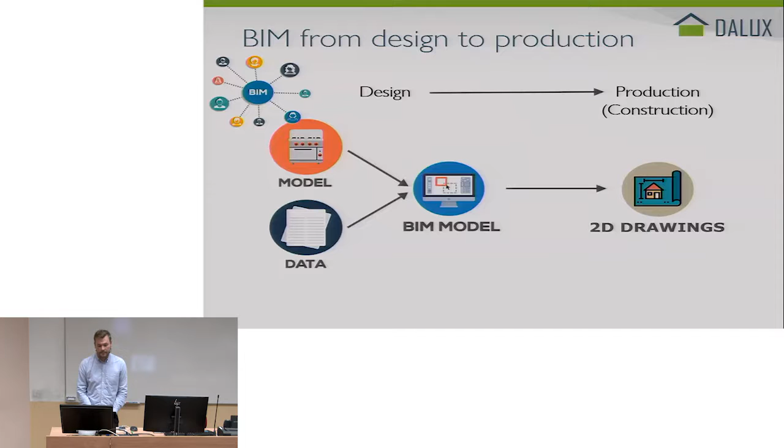So what we've done at Dalux is we created a BIM viewer. And a BIM viewer you can use on your mobile device. So what we tend to do at Dalux is make user-friendly software that's easy to use on site. Because when you go to a 3D model, if you don't have experience walking around a 3D model, it takes you 2 seconds and then you're lost.

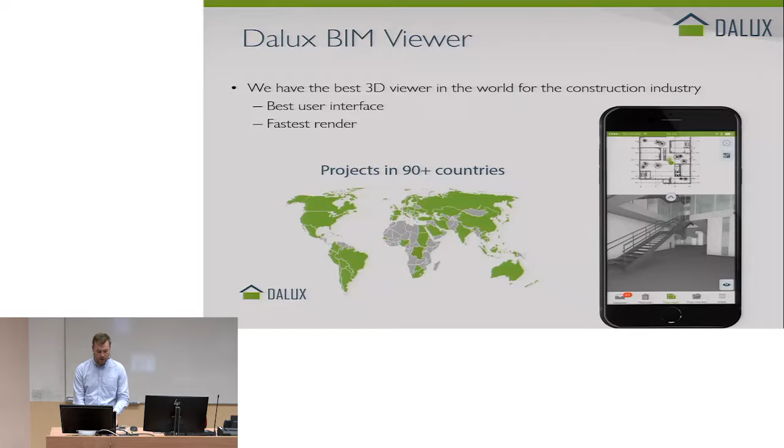So what we do is we have created software that makes it possible to take these really big BIM models on site, and you have the information directly on a device. At the moment, this is free software. You can download and use it to explore your models on site, and it's used in over 90 countries around the world. So instead of just talking about it, I really want to give a small demonstration of it.

So, can you see? Yeah. Maybe it's a bit confusing.

This is my mobile device, and here I have a 2D drawing. When the project managers upload the 3D model and the 2D drawing, you have that directly here on site. Every time they update this information, you have the newest version on site automatically, in a tool you already have in your pocket. This is now a very powerful site tool.

So I can navigate around this 2D drawing and see the information here. If I click on a room, I will have all the parameters of that room assigned to it, directly on my phone.

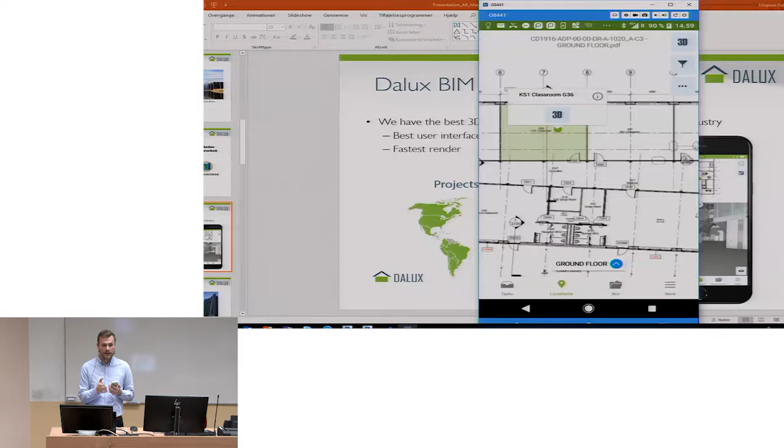But where it gets really, really good is that you can take that room and click on 3D. Now I have my 3D model directly in my pocket and I can walk around it.

For this to be user-friendly for people who've never been able to walk around a 3D model before, we have the 2D drawing on top. So you can always see where you're walking, where you're at in the building, and you have that information directly up here. You can also use that drawing to press any room you wanted to go to.

If I wanted to see the staircases, I just go there. Zoom in and zoom out.

The same goes for the possibility to create different filters. Different filters can be very beneficial for different workers. For example, I have a construction view here. I've just used the parameters of my Revit model to create different filters, and I'm able to use these filters directly on my device. This is just the architectural model, and it goes on and on.

Another thing, you can create sections directly here on your device in real time. You could also do it here, if that would make more sense. And it's all done on a device I have in my pocket already.

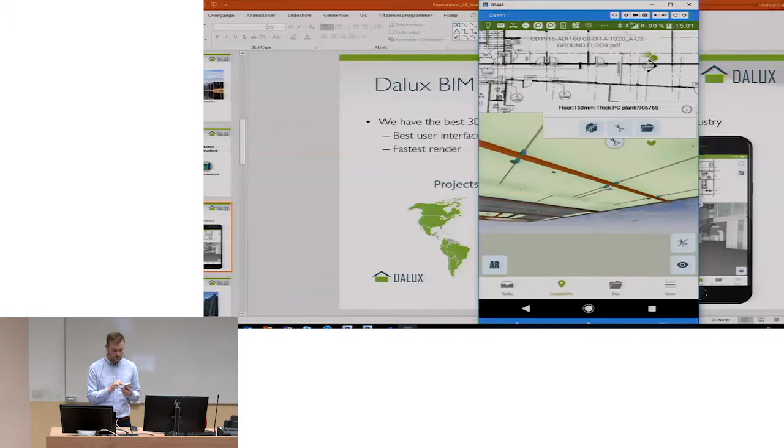You can, of course, hide stuff, if that's something you need, to have some information behind a wall or the ceiling, if you wanted to see the ventilation, or hit the right spots. Let me go out here, that's better. So you can see all that, what's behind the ceiling, and you have that available on a mobile device.

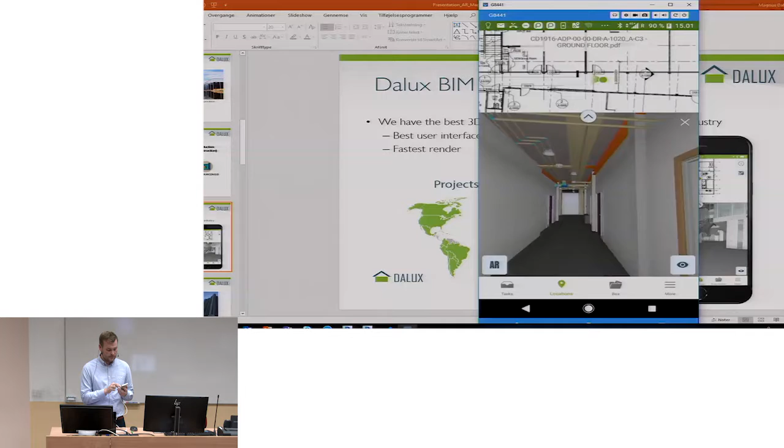Whenever you add information to the model as a parameter, you have that in your pocket. So if you have a ventilation pipe, you can see the offset of that pipe directly in your pocket. You're not able to see that on a 2D drawing. So whenever you add information in the BIM model, you have that information on site.

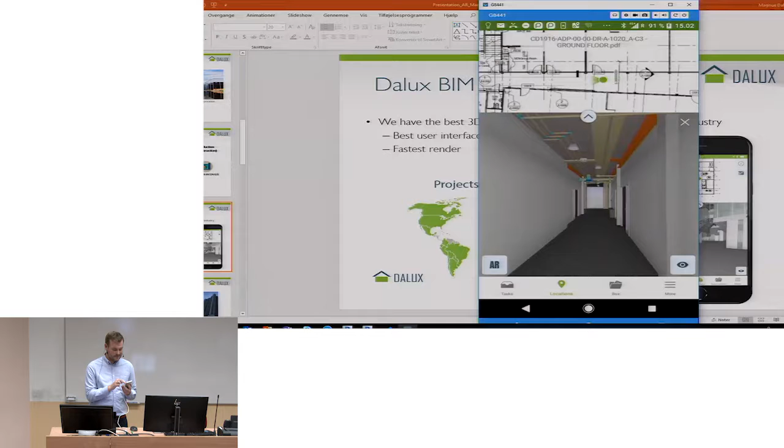So that's our viewer. And when I say it's the best viewer on the market, I have an example here.

This is a guy called Stephen Au who uses this BIM tool in Hong Kong. He has a project with 5 skyscrapers, 189 Revit models, all federated in Dalux, and he's able to show that on his iPhone. That's 2.6 million square meters of BIM model directly in your pocket, with information attached to every object. That's quite impressive, I would say.

So what we've done on top of this software, we have now looked into the new thing called augmented reality, AR. When we wanted to bring this tool into Dalux, we had a bit different success criteria that we wanted to achieve. Because we have this BIM model on a mobile device, we wanted to bring this technology into AR. One of the things was we wanted AR without these space helmets - I'll get back to that later. We wanted it to be flexible, so different people on site could use this very easily, and we wanted to fit it into a mobile device.

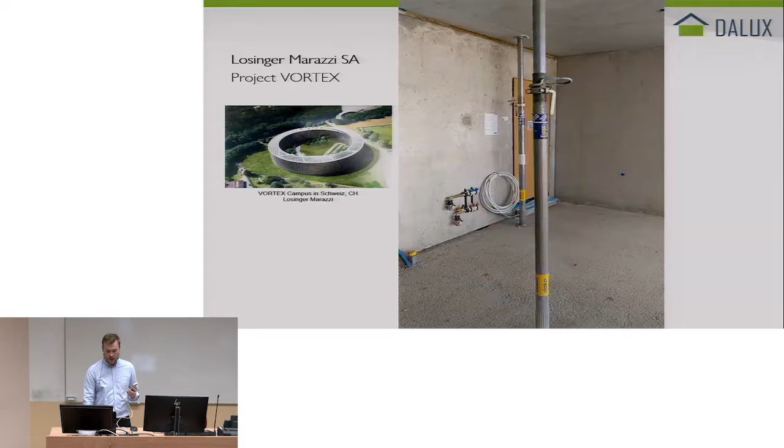So I will just show you a small video. This is a company called Losinger Marazzi, who made a video of this on a project called Vortex in Switzerland. So this is just a small video that shows how they used it.

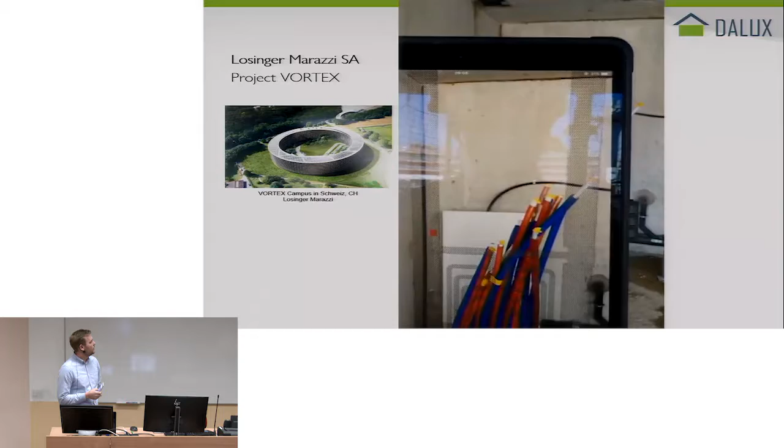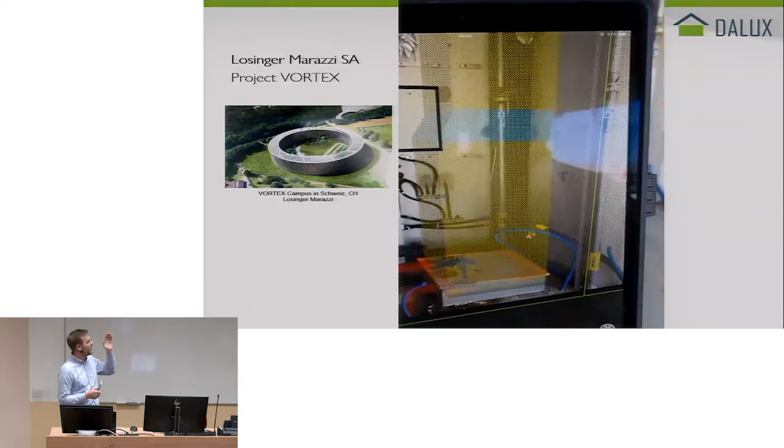So they can see, when they go on, what's behind the walls and what's coming. Here you have a ventilation shaft behind the wall. When you go a little further, you can see the walls that's coming, that's not been built yet. Here you just have the concrete and you can see where the wall's coming, but it's not there yet. So you have that information directly on site.

I'll try to do a live demo later, so we'll see if it works. They use this on a big project in Switzerland, and they all have that when they walk around the site.

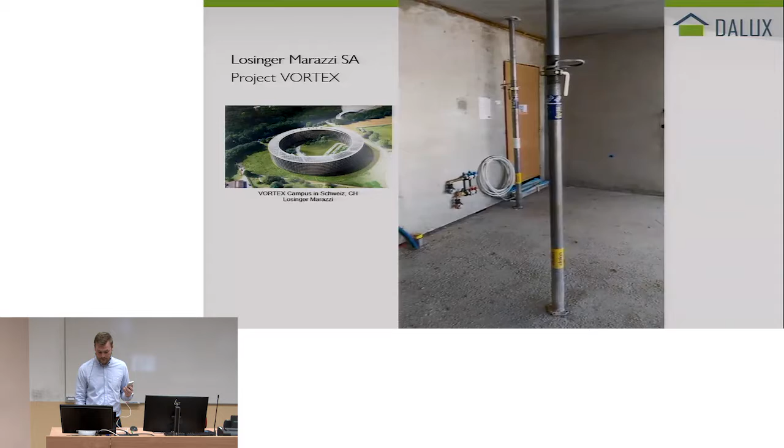So the development of this tool started in 2016 because Microsoft launched HoloLens, and HoloLens was the first technology that could fit this, make this AR. So of course what we did at Dalux, we bought a HoloLens for $3,500. That's a lot of money.

So HoloLens is a solution where you take these glasses on and you can walk around and see your BIM model on site and what you see in real life as well.

Some of the barriers of the HoloLens is that you need to have a safety helmet. This was back in 2016. I know that Trimble have come across this, so of course it's possible, but that was the barriers back in 2016. HoloLenses, each glasses are very expensive. I think they would cost around $5,000 a piece. So there's a big expense to put into a new technology where you don't know if it's working yet. And of course there's short battery limitations, so when you use it, it's from half an hour to 2 hours.

So what happened in 2017? Google launched Tango. They took the technology of the HoloLens, put that into a phone, and then we were able to develop this for the Google Tango phone. So in 2017, we released AR on a mobile device. This was never seen done before, so this was revolutionary.

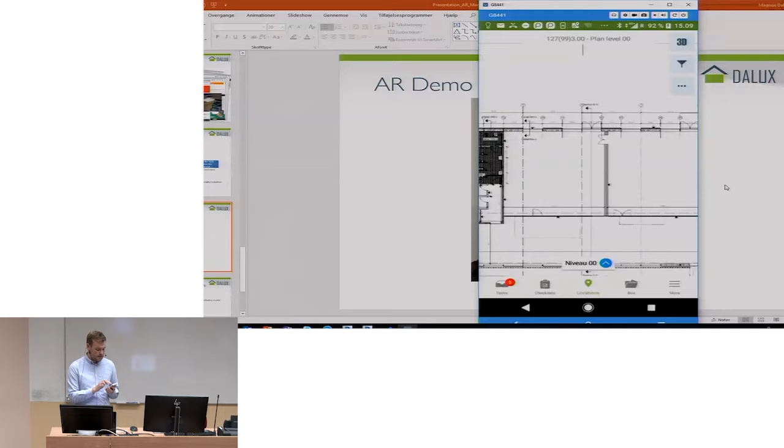So I'm gonna go into my locations. I'm gonna pick a 2D drawing now. I'm just gonna turn off the snags so it's not too confusing. I go in here, I find the room that I'm standing in. I'll place myself in the middle because this is a presentation. Normally you would put yourself in a corner because you have to align the BIM model to a corner. Maybe I should actually stand out here because that's better.

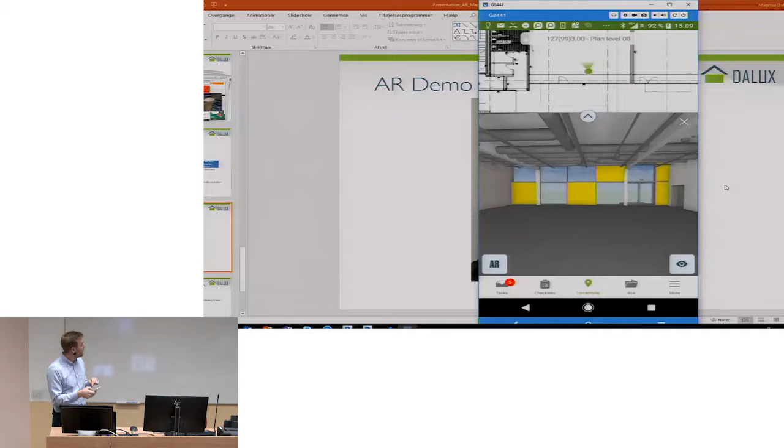So here I have my 3D model. Again, I have all the information here about the different objects in the BIM model. But now I have the ability to click on AR down in the left corner. So I click on AR, and let's see if it works, because I need a bit of lighting on the floor to scan a reference point. This was actually quite easy.

Then I would rotate the model and find a corner. This is again an example, actually a DTU project back in Denmark. So this is not the accurate room, but you'll get the point. When I find the location in the corner, I save the location, and bam - I now have my real life, and I have my BIM model at the same time.

So here I can click on objects, I can show or hide them. Again, I can click on them, and I can see the information about them.

I talked to a contractor in UK, and they said that each year they spend like a 2-digit million number on correcting errors. For example, when you put ventilation through a concrete wall, they will do the holes in the wrong places, and then they have to correct them and make a new one. So it's a big industry to see where your piping goes, for example, through your walls - make sure that you put them in the right place. And at the same time, you have the information about these.

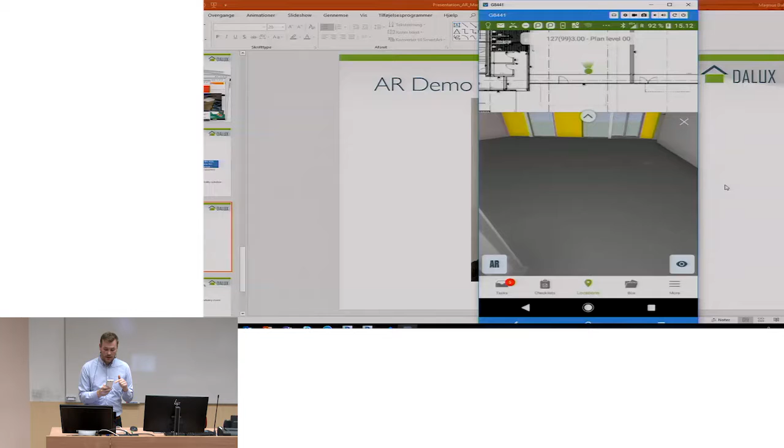And you would have a list of all your snaggings directly in Dalux. You can make big reports of this, and then go to the construction site and say what's wrong and what's that.

So an example of this is that when I did my master's at Aalborg University, we had this new big building for the construction department. Of course it was 2 years delayed, and when we moved into the building, there was still a snagging list of 1,300 snaggings for different objects in the building that were errors or stuff like that.

They had this in an Excel spreadsheet. That gets really confusing really fast because you lose the overview of where you're at and the status of these - what about the pictures? You can't assign them in an Excel spreadsheet, so you need to have them somewhere else. So Dalux is all about using the software or a mobile phone, the device you have, the tools you have already, and put them onto the construction site, because this is something everyone has. They have the tools, they can have the information directly in their pocket.

So just to have a small discussion about what we see as a software developer about creating new tools for the construction industry - these tools can make the processes a lot better, but there's one thing we have to change in the construction industry, and that's the mindset. Because when you go to a site and a contractor, a carpenter for example, has done their job for 40 years, we need to change the mindset - what they've done is probably maybe not the best way, and there are things they can make better, and you can do this with this new technology that's coming.